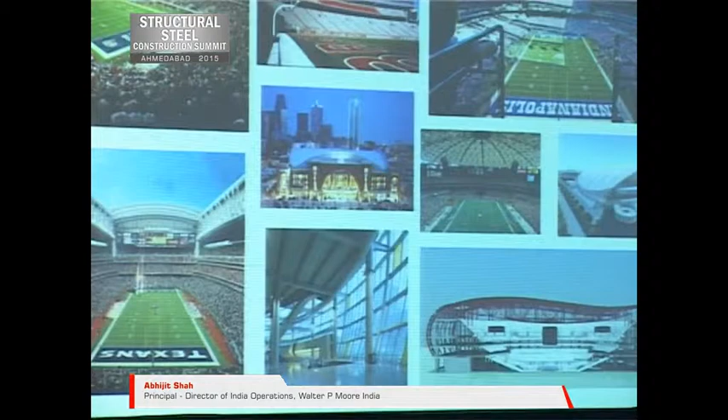In the steel part, we do everything that has long span structures. That includes airports - we're currently working on 3 international airports - a lot of convention centers, performance venues like performing arts centers and auditoriums, and most importantly, sports. That's my topic today.

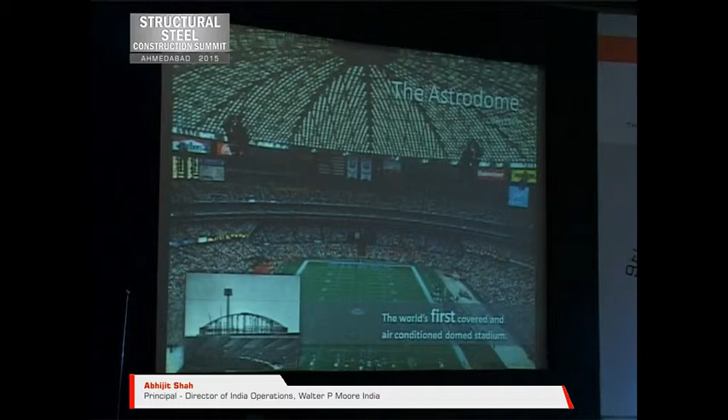We've done a lot of open air stadiums, like Target Field, which has won a lot of awards. We've done a lot of arenas, I would say at least 30 or 40. I know there's an arena coming up here in Ahmedabad, so I'm pretty excited about that.

The culture of having sports teams and sports stadiums has been slowly increasing in India, and that's very encouraging. We used to be a very cricket-centric country, and now all of a sudden sports like kabaddi, football and tennis are taking off, so that's very encouraging.

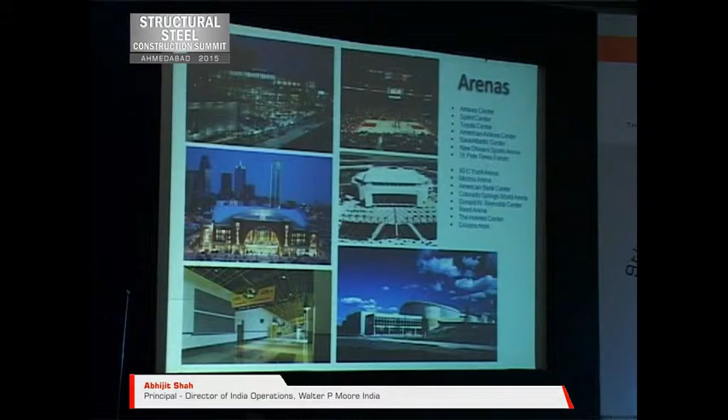I guess I've always been a wannabe sportsman, but I was not good at that, so I figured at least I'll help design some of the structures. This is one of our stadiums, Sprint Center arena.

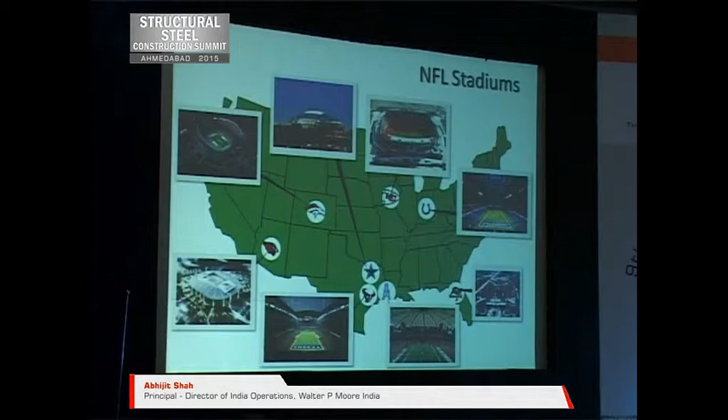We've done a lot of NFL - National Football League, and football here is American football, so pardon me for that - a lot of those stadiums as well. One of them, Invesco Field, about 65 or 70,000 people seating capacity for the Denver Broncos. But most recently, we have been the designers for the last 6 retractable roof stadiums in North America.

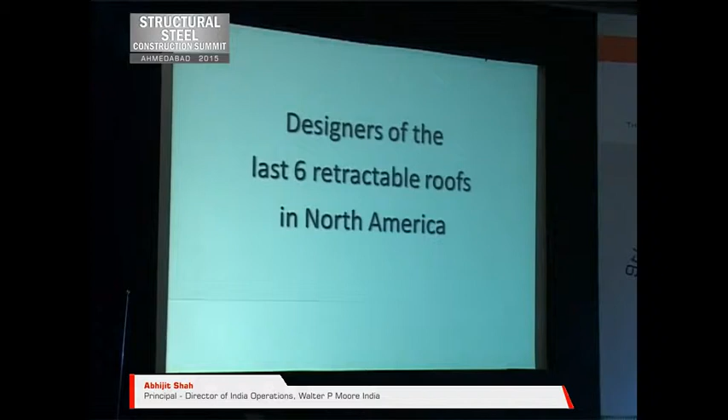Before I get to these, I wanted to try to answer a question: why? Why do we need a retractable roof on a stadium? There are multiple reasons why.

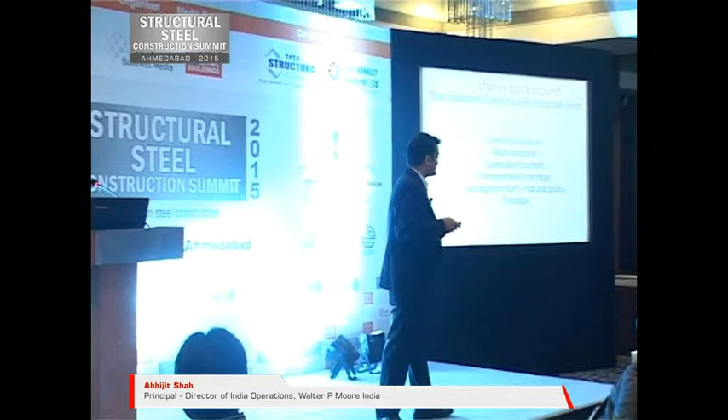But as in any other case, money is what governs anything. So there's a money background and a business case for having a retractable roof stadium - event assurance. If there's rain and the biggest event of the year, a tennis final or football game, has to be postponed, then what's the point? There's a lot of loss of revenue there.

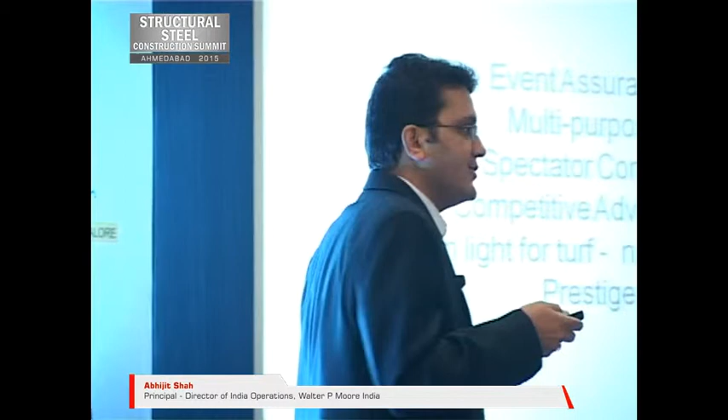You can turn your stadiums into multi-purpose venues. So if it's a football stadium, you can use it for other events like concerts, things that might need an open roof or a closed roof depending on the type of day. In Indian culture - I'm going to go to a wedding in Pune next month, and they're going to use a stadium to have a wedding. So just to generate more revenue, having a closed roof makes sense.

Spectator comfort, obviously - you don't want to go watch a cricket match... well, obviously, as Indians, we do spend the whole day there when it's very hot. Rajasthan Royals, for example - so having a roof and an enclosed stadium would be good.

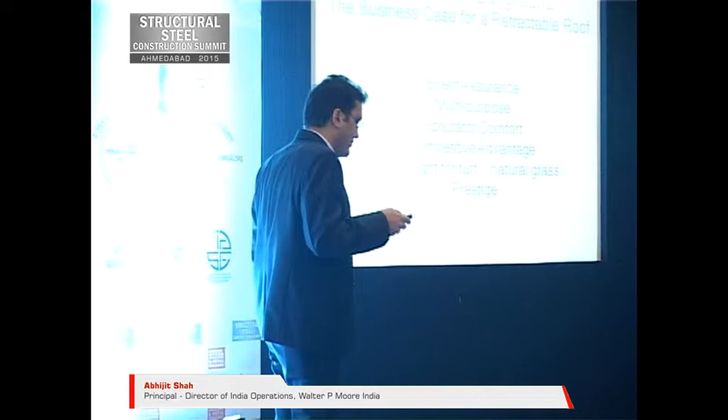A competitive advantage - you'll be able to sell more events than somebody else who doesn't have that. It's also important for a lot of football stadiums to have natural grass, and you cannot have natural grass if you have a closed roof stadium. So you have to have the ability to open the roof and let the grass grow a bit. And then there's prestige - that's one of the reasons we've seen around the world that just because some other team has a retractable roof stadium, this owner wants to have one as well. That's all right for us, I guess.

But if we are thinking that this is a new concept, to be able to be comfortable, to get sunlight or shade - think again. The Colosseum was the first retractable roof stadium.

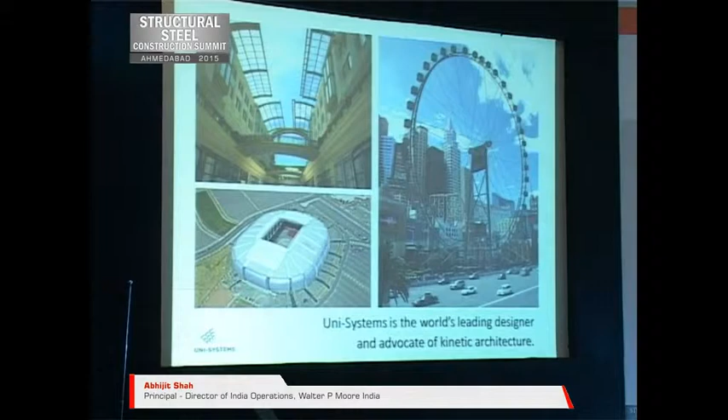Obviously it was a multi-purpose arena. Any architectural element that we can make move - it could be a wall, roof, anything you can think about - that's kinetic architecture, and they're one of the leaders in that. They do different types of projects, which I'll touch on a little bit later.

So coming back to the retractable roof stadiums - the first one we did was in 2000, done with the architect Populous, almost 41,000 seats in the ballpark. This is a baseball field, Minute Maid Stadium, in Houston. I'm not going to spend a lot of time on all 6 of them because I don't have that much time.

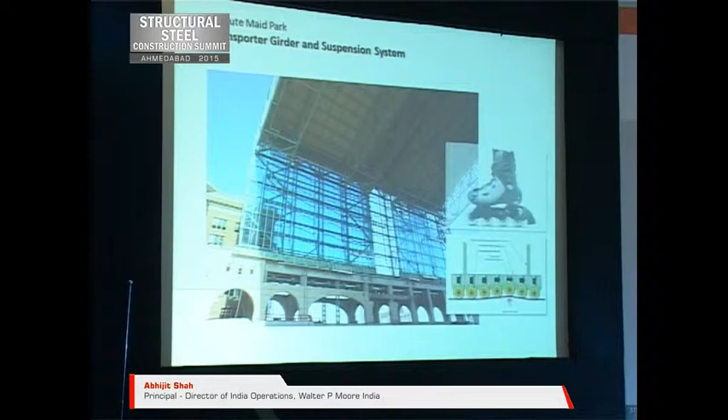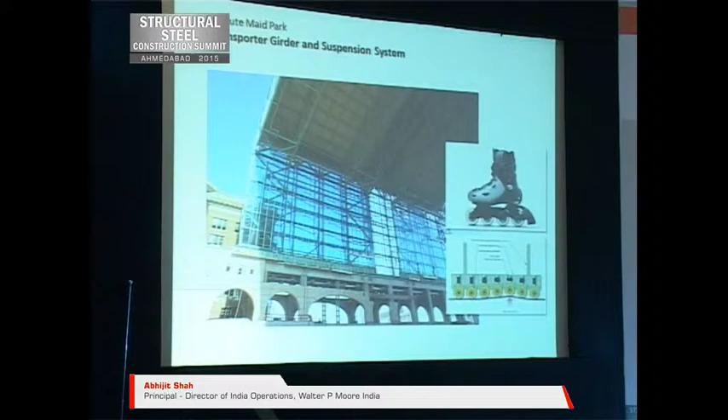I'll quickly go through this, but this whole entire roof moves and closes, so it becomes from open to a closed stadium. A retractable roof - you cannot think about it as just a fixed roof on wheels. There are many more complications that have to be designed: construction tolerances, temperature differences. We'll get into that a little bit.

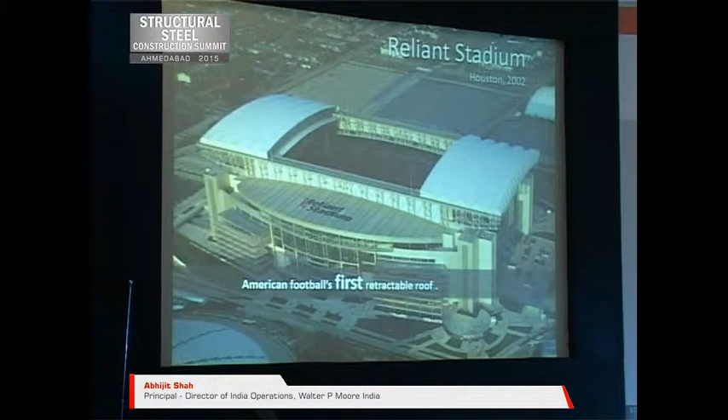The second one is the Reliant Stadium, again in Houston, and this is the first football retractable roof, American football. Here you can see these 2 big trusses, supported on these super columns. There are only 4 columns and 2 big trusses that support the entire roof. Then there are these elements - the retractable roof that closes it up.

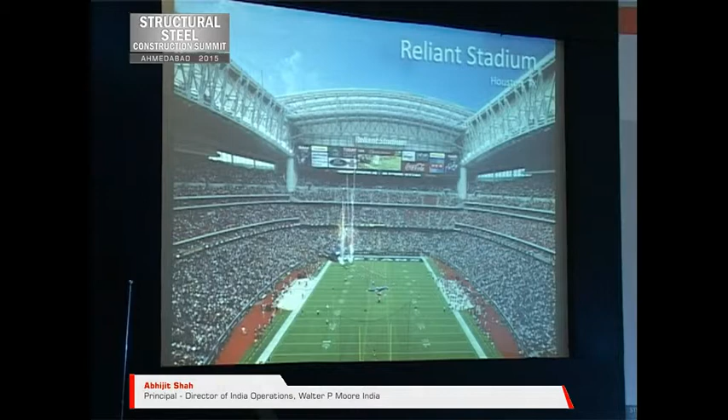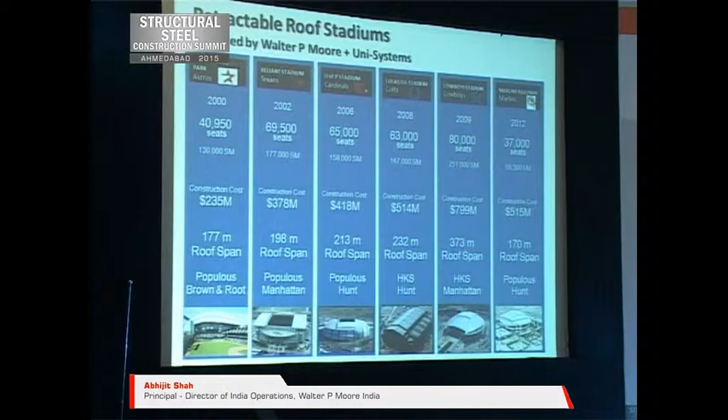The next one is the University of Phoenix Stadium, where the Arizona Cardinals play in Phoenix. This one - I guess in one of the presentations earlier we talked about keeping the structure simple, having a minimalistic approach - this truss is a very unique design here, and hopefully I'll have some more shots of that.

Here you'll see a little bit of a difference - this roof is a fabric roof because it allows some light to pass through it as well.

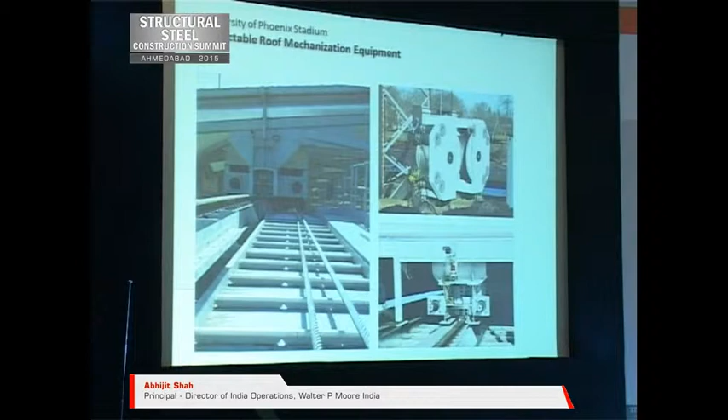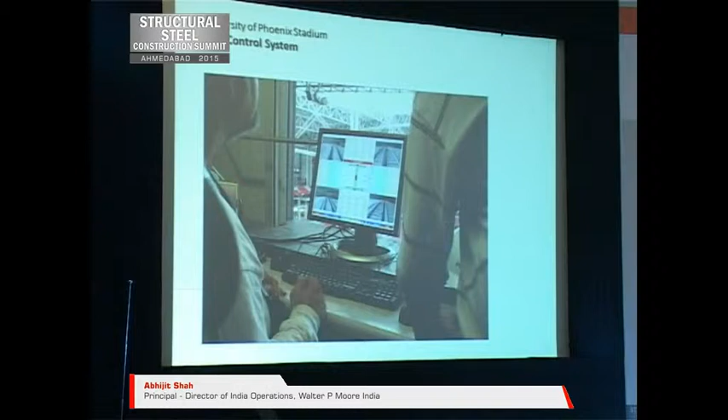This is the drum and cable mechanism used to move that roof. It has a very automated system, so basically we are moving this roof at the touch of a button. It takes about 12 to 15 minutes typically to close or open these roofs.

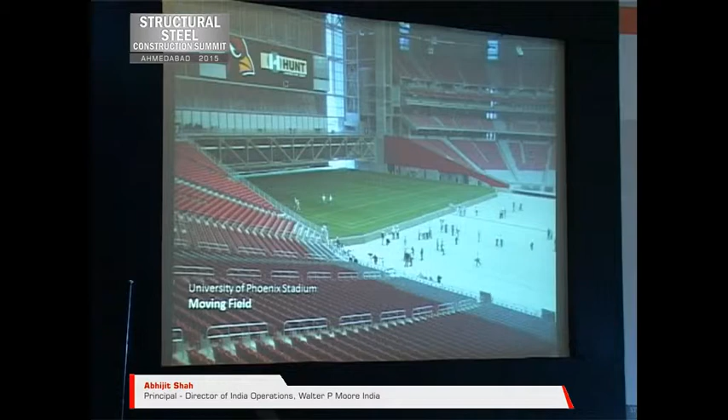A unique feature about this stadium is it doesn't only have a retractable roof, it has a retractable field as well. The whole field where they play football on is a structured thing, and the whole thing can move out of the stadium so that they can grow natural grass to play football on. So we have to do a lot of testing - these huge 300-pound guys, when they're all jumping and running around, shouldn't feel any vibrations. So we have to do a lot of prototype testing.

The next one is the Lucas Oil Stadium in Indianapolis. This is like a very Midwest country design, so it has a barn kind of feel to it.

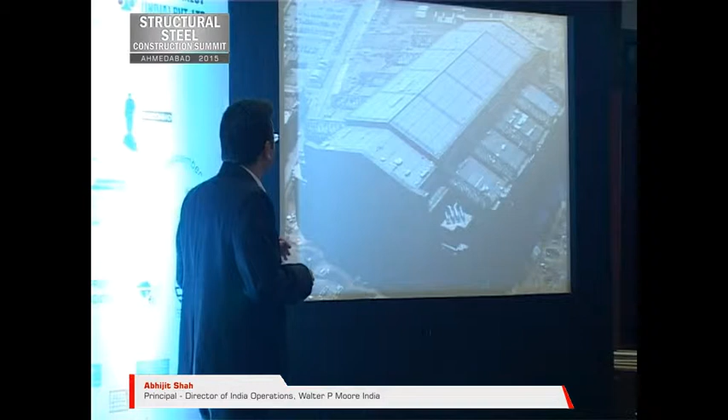These are the panels that open up on both sloping sides, and it also has an operable wall which opens up. Again, this has a little bit different drive system because it has to go uphill.

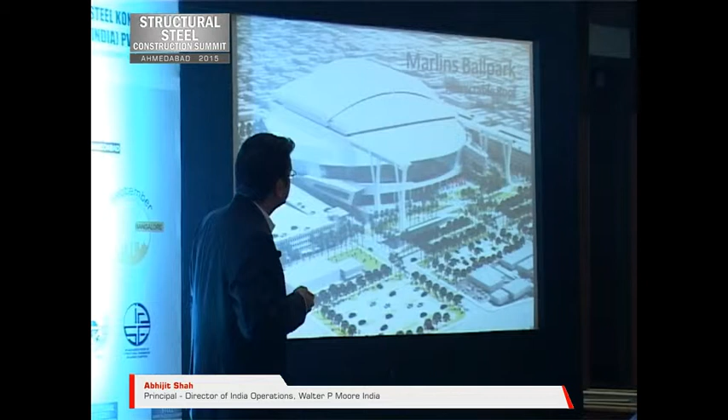I'm going to skip the Cowboys Stadium for now and go to the Marlins, the last one, the Marlins Ballpark. This is in Miami, Florida. The unique thing about this one is the roof all goes on one side.

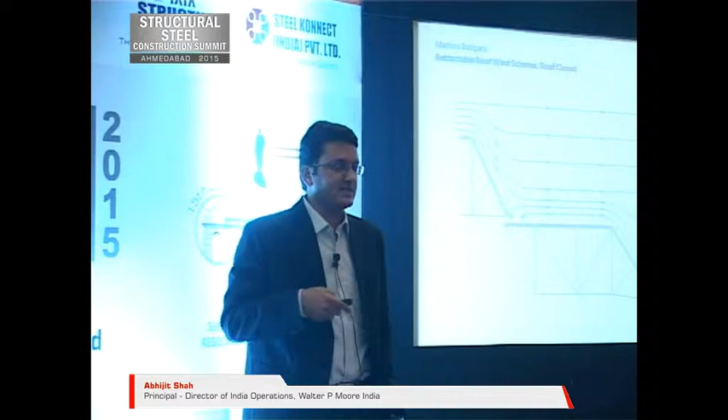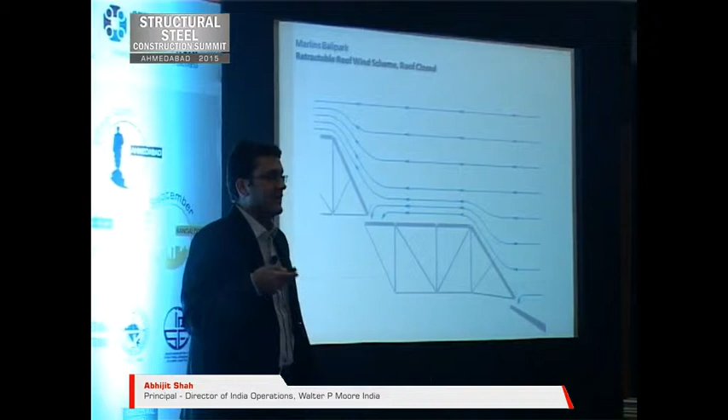One thing we do on all these projects is a lot of wind tunnel testing, because we need to understand the wind pattern, especially being in Miami where there's a chance of hurricanes. One of the charges given to us was that it has to not allow any air to come into the stadium during a hurricane so there's no damage.

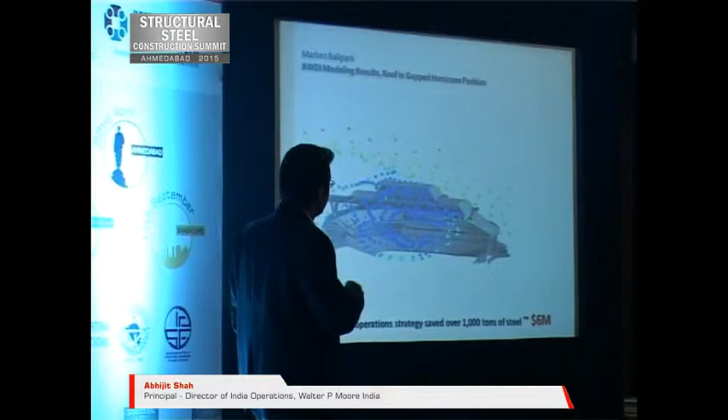We did a lot of wind tunnel testing and fluid dynamic testing, and we realized that if we actually keep a little bit of gap in there and let the air come in, we were able to save about 1,000 tons of steel. That's about $6 million worth of steel saved by doing that.

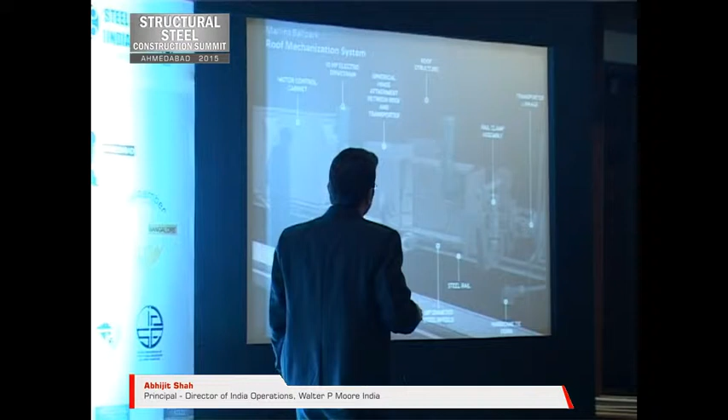This is just a shot of the mechanization. You can see the transporter, which is a stiff member here, and then the hurricane ties that hold it down and tie it back to the structure. Here's a shot of that, and here's a shot of the construction.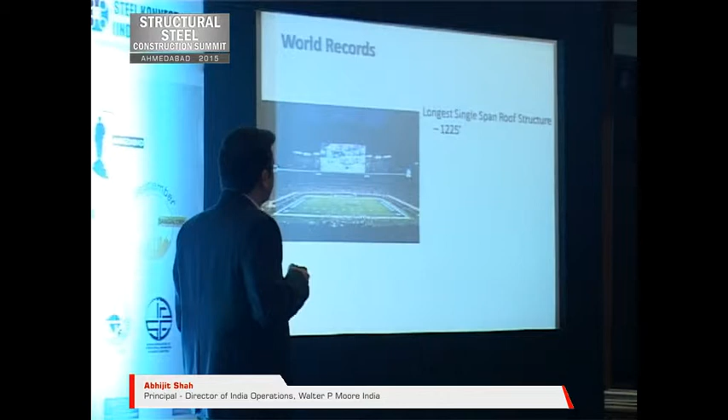This stadium sets a lot of records, five world records basically. First, it has the longest single span roof structure, with 1,225 foot long arches. That record still stands, and I think I'm very fortunate to be able to work on this stadium.

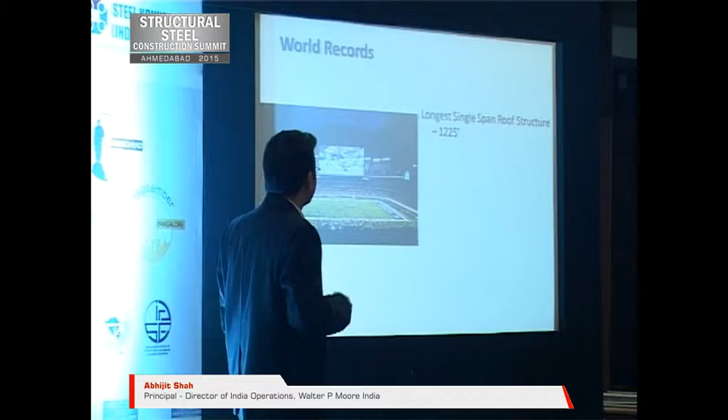This is one of the largest dome sports facilities with 660,000 square feet. Again, the largest video board display - this thing here is 150 feet long, it's huge. It also has the largest operable glass walls.

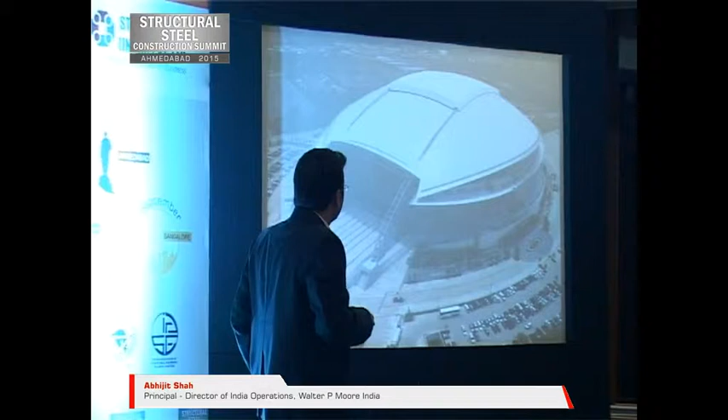So this is the overall view of the stadium with these arches that go from this side to the other side. There are no interior supports on the entire stadium.

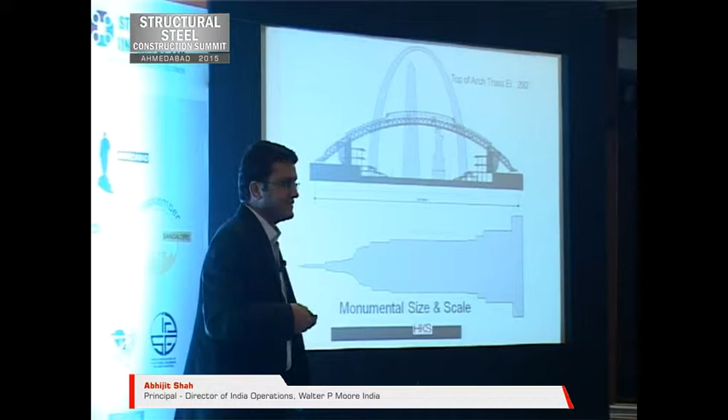Well, this picture pretty much speaks for itself, but here's the Statue of Liberty - you can stand up right inside it - and the Empire State Building. That's how long the arches are.

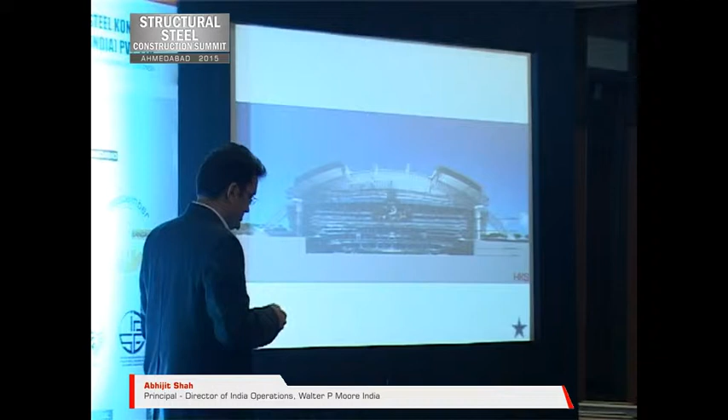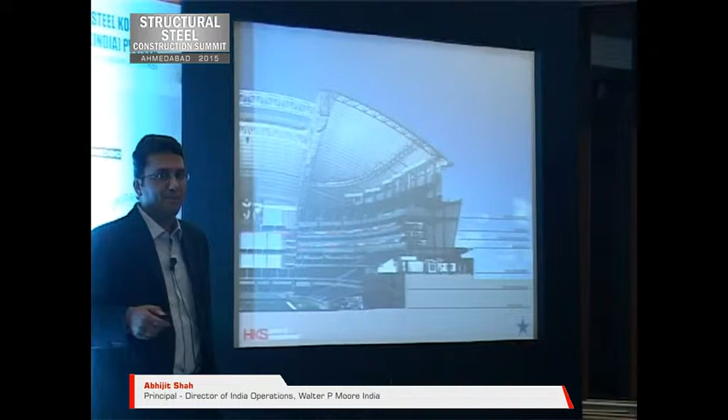This is a section showing that. This is 50 feet below the ground, where the playing surface is in this case. Another section shows there's a lot of box or suite levels in this sector, and a lot of seating as well - there's actually 11 elevated levels of concrete seating.

Just a quick thing about the schedule: the design took 17 months, the construction took 40 months, and it took 8 million man hours to do the construction, and I only get 20 man minutes to present it, so we're going a little fast.

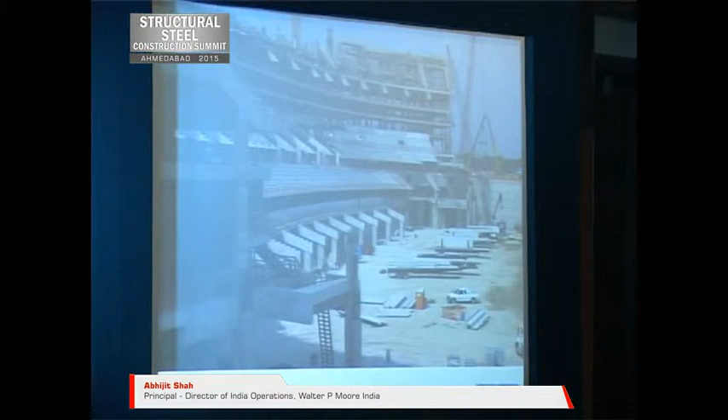I know we are talking about the steel part here, but just to give you an idea, this is how the concrete construction went - there are 11 levels of it. This can seat 80,000 people at one time, and for a special event like a Super Bowl, it could seat 100,000 people.

The reason I'm showing this picture is there's a ring beam, a concrete ring beam, which supports the roof on one side. This gives you a general idea about the scheme for the roof, where basically we have 2 arches, then 6 box trusses that span in between the arches. These are the 2 retractable panels that open out, and the secondary members that span from the roof to the concrete beams.

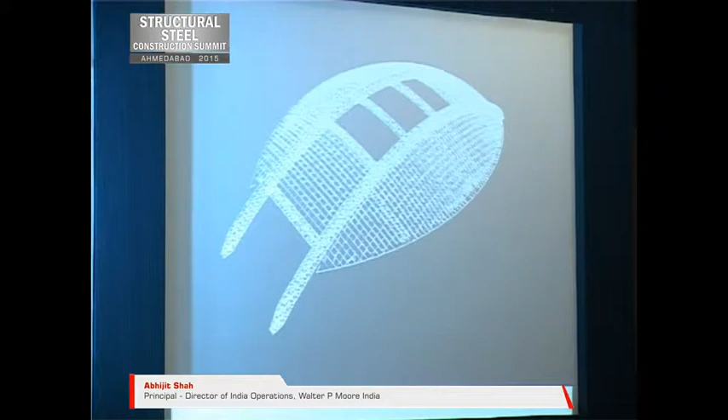Just to show the different members, here's the steel deck. The load from the deck goes to the secondary trusses, then to the box trusses, which in turn transfer it to the 2 arches. The secondary structure, these planar trusses, span from the arch to the concrete ring beam here, which is this member.

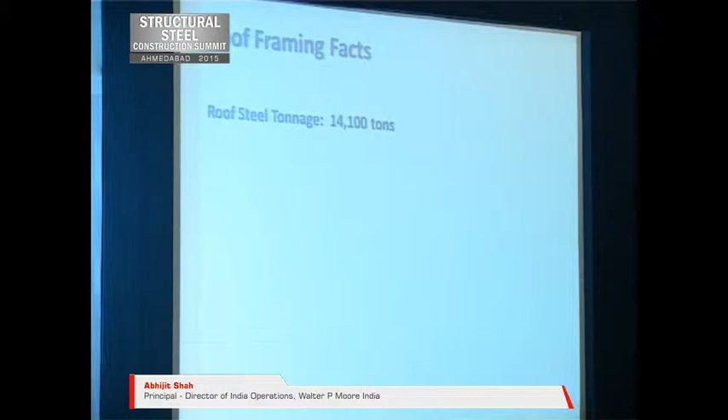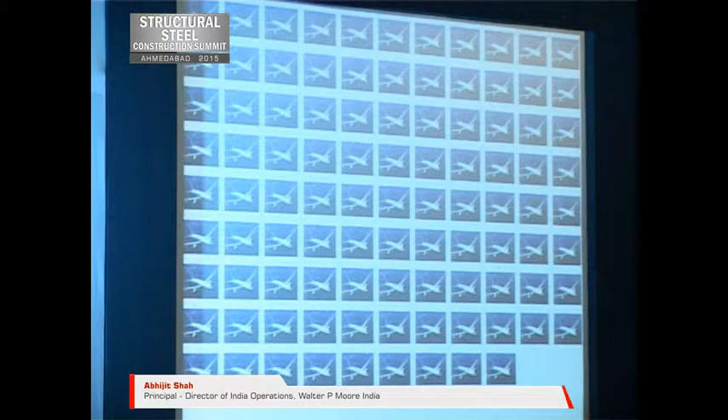This is the model of the bowl, just to give you an idea, and that's the complete model of the structure. So this project had 14,100 tons of steel, and that's about - if you take a Boeing 777 and use 97 of those - you get 1 Cowboys Stadium.

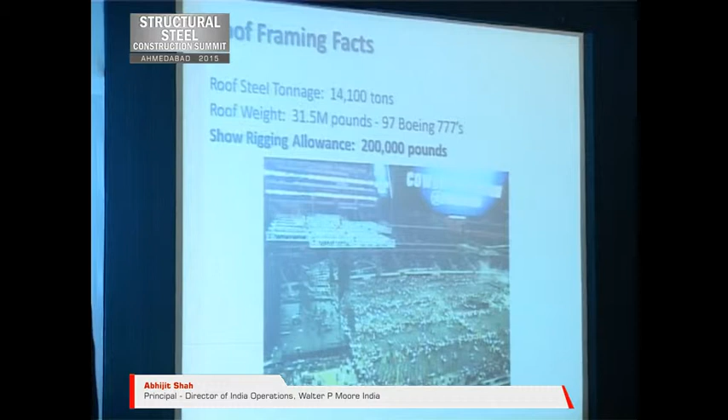The show rigging allowance, that's another thing from an event standpoint. We can support up to 200,000 pounds of show rigging. This is a concert, so the stadium is now transformed into a concert. I guess people are still coming in.

The arch trusses used a grade 65 steel that was imported from Luxembourg. They don't make that in the US still. The rest of the steel was grade 50 and grade 36.

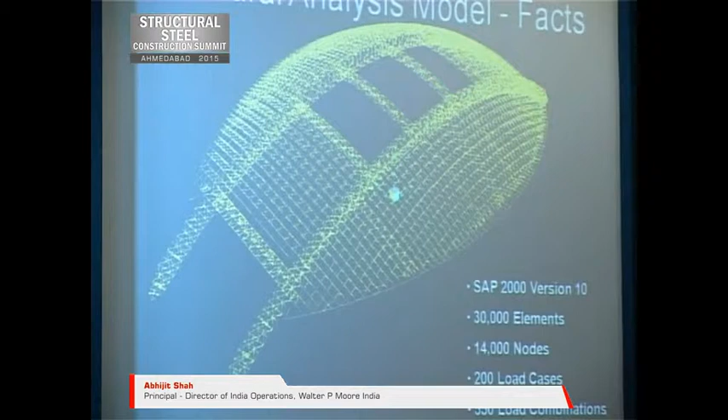That brings us to the analysis model. So now you take all those wind conditions, and that gives you 200 total load cases and 550 load combinations to run in that model. We used SAP to design this. There's 14,000 nodes and 30,000 elements in this model.

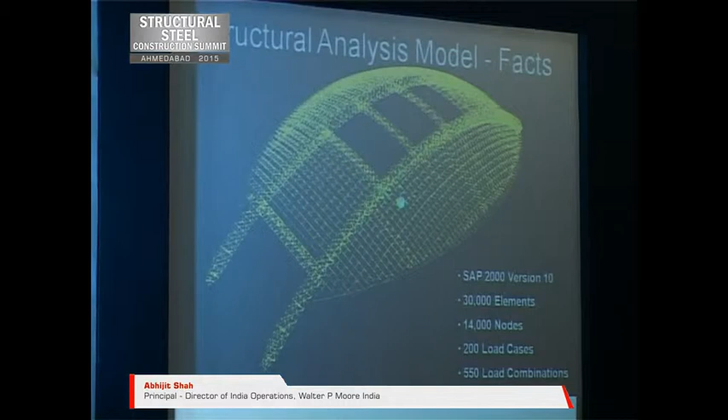This was only 3 or 4 years ago, but the computing power we had, even compared to what we have right now, meant to design the model we had to run it overnight on 4 or 5 different machines. The next morning you'd find out you made a mistake, so you'd do it again the next day. The next night you'd wake up at 3 o'clock in the middle of the night, hit run again, and go back to sleep. We had to do quite a bit of that.

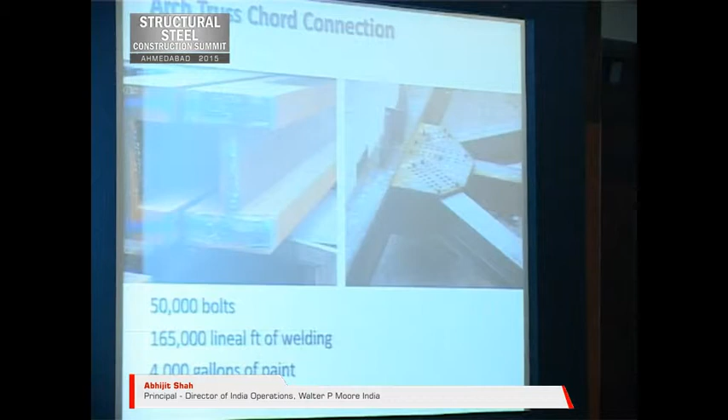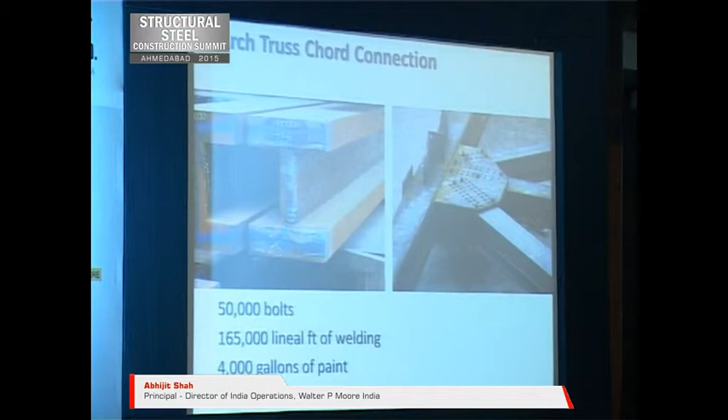The steel arches themselves, like I said, each one weighs 325 tons. I just threw in this picture to give you an idea. The 4 chords of the arch trusses - the arch truss was 35 feet deep, 17 feet wide, each one of those. And each one at the 4 corners had a member like this, 14 by 730 - that 730 means it's 730 pounds per foot, the weight of each member. There's 4 of those, trussed out in between. That's pretty heavy - I'm 150 pounds, so you can imagine how heavy those things are.

On all our projects like this, I think the structural engineer's role is not only in designing and then going away - I know there's a lot of fabricators and steel providers here. So we do a lot of design work or erection analysis for our contractors as well. We design, and you have to do that while you're designing it. If you don't know how it's going to be built, then just designing it in the final condition doesn't really do you much good.

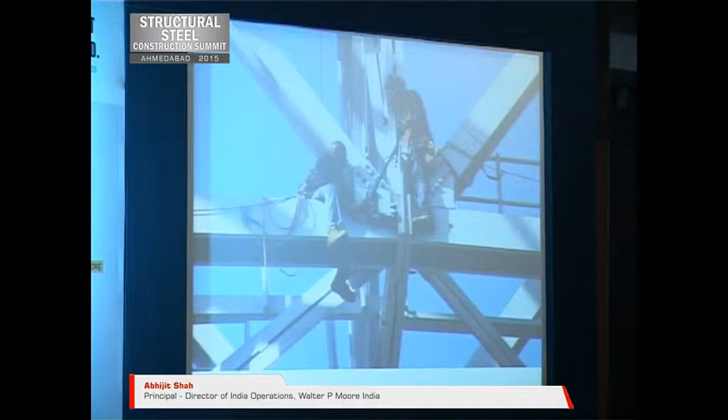We design each of those trusses. It was like in 57-foot segments or something, and then it was connected by end plates.

This picture is showing the arches being built from both sides, and thankfully they met correctly at the center. That's how the shoring towers were used. This day, none of the engineering team will forget - this is the day they took off the shoring towers.

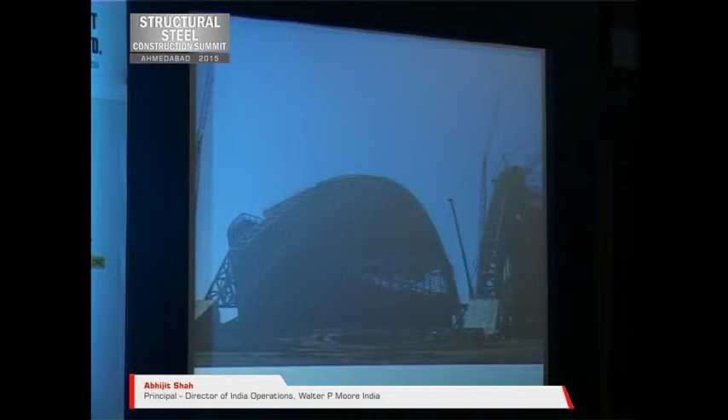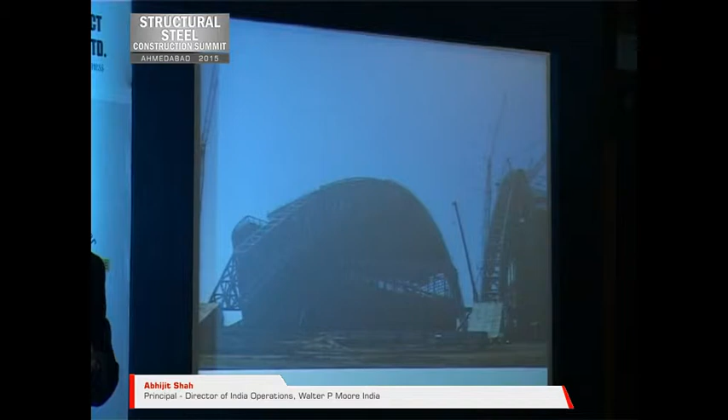Even though you know you've designed something correctly, that day you're a little bit nervous - confident but still a little nervous. The deflection we had designed it for, analytically we found it was going to deflect 15 inches, and that's exactly what it deflected to - it was 14 point something, but pretty close, I would say. So like I said, the integration of the erector early on makes a hell of a difference.

I'm going to talk a little bit about the arch supports. With all this thrust coming down, the arch support pin condition was very critical. This was basically the pin bearing - if you see there's 1, 2, 3, 4 elements going on. That was a casted element, cast in Michigan, milled in Massachusetts, and then brought to Texas. It's 64,000 pounds each, so it had to be perfect for it to be a pin element.

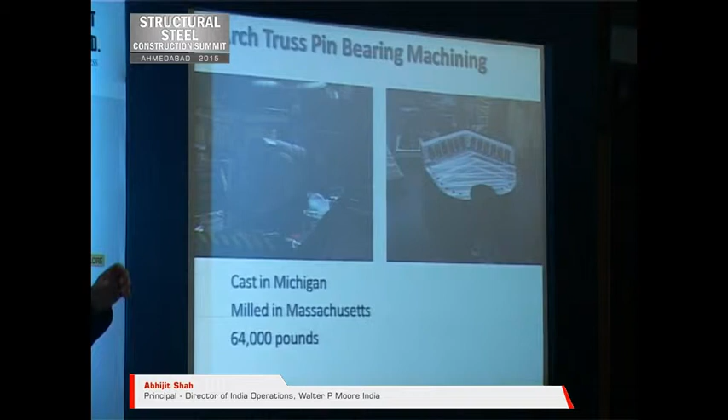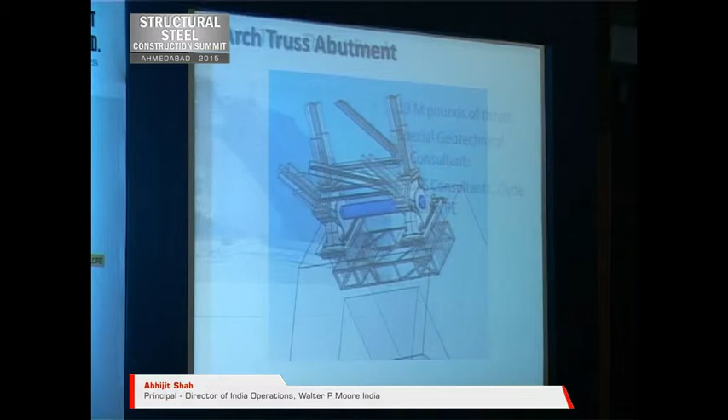Then we had to put it on the field itself, and it was supported on this thing which we were calling the abutment, with a lot of anchor bolts connecting it to the abutment. This is an interesting picture - this is what's above the ground, and this is where that steel pin we saw is going to go. This is the abutment - looks like it's steel, but it's concrete.

It's just 1% reinforcement, but to get an idea of how big it is, you'll see there's an iron worker over here, just one guy. This is huge because it has to support 19 million pounds of thrust. What you see above the ground is this part here, but below the ground we're resisting all that in friction. This thing is 170 feet long and 71 feet deep, with two walls at 18 feet on center. So it was a huge reaction.

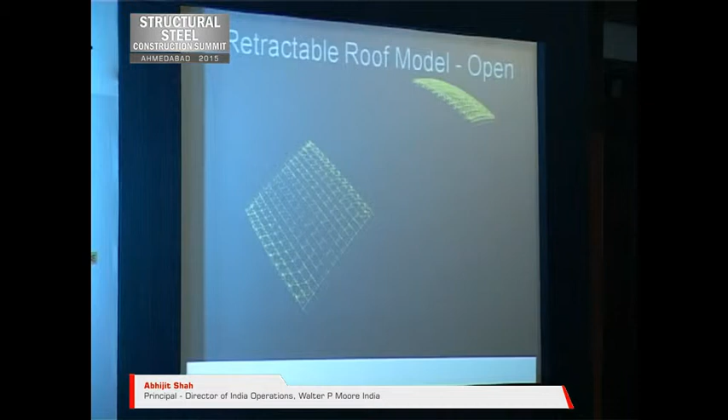Talking a little bit about the retractable roof models. These are the retractable pieces that come and park over here. This is shot from the inside, shot from the outside, and it's lifted up. But this is how we designed it.

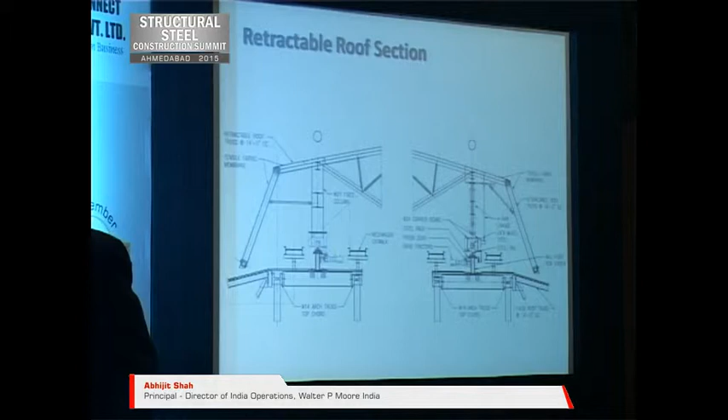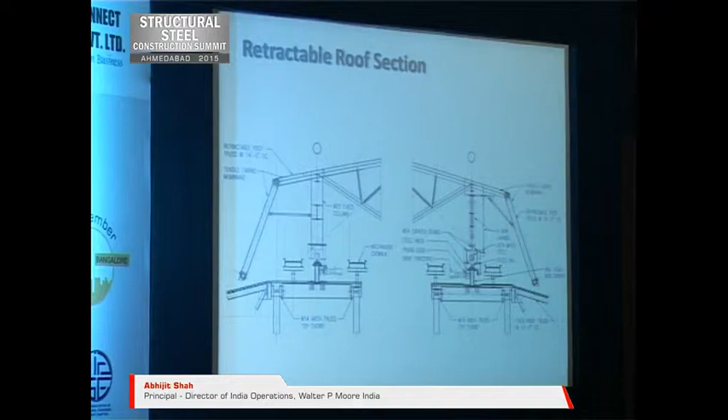This is like a section cutting through the retractable roof section. On one side it's fixed, on the other side it has the 4-bar linkage. So when there's any lateral movement due to change in temperature conditions, or some misalignment in the rail, it shouldn't damage the rails or the operation. That's why we let this move, and I have another way to explain that.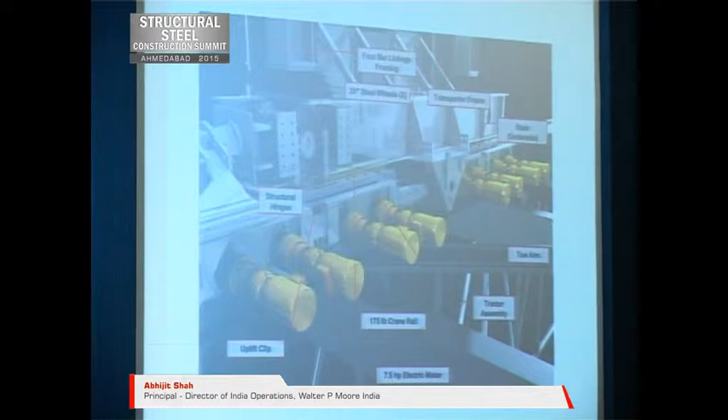This part, the main transporter frame, is rigid. This is the 4-bar linkage over here, and these are the electric motors, only 7.5 horsepower motors, 64 of those for each one. So it doesn't take a lot of horsepower to move these things.

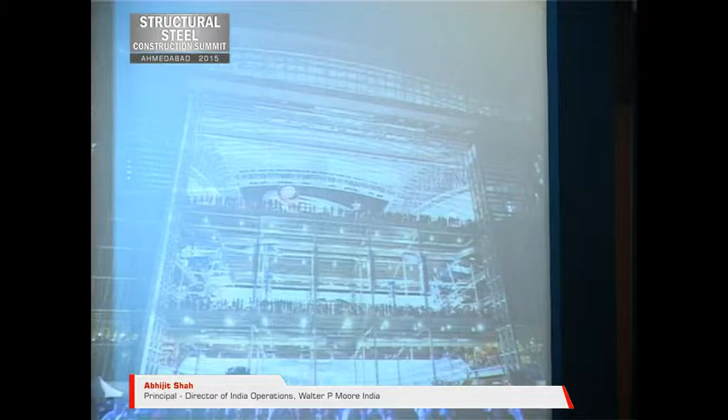This is another shot of that and the actual picture. I'll show you a few more construction photos of that, just because I like it. Let's go through that real quick. This is a nice view, the two glass walls that are opened up, and you can see the entire stadium. People can stand outside, inside, and mingle. It's a huge structure. This is an interior shot again.

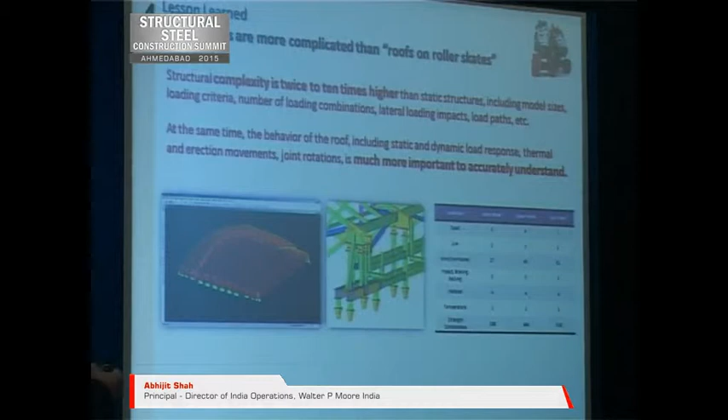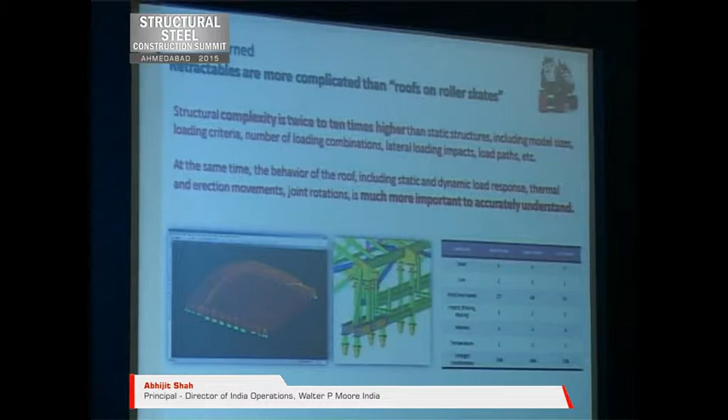On these 6 projects that I just talked about, there are a lot of lessons we've learned, and we captured those because a lot of things have gone wrong in previous projects, not designed by us, but I'll show you some examples. One thing we have to understand is retractables are more complicated than just roofs on roller skates. That's not what it is, because the design has to account for complexity that's twice to 10 times higher than a static structure.

There's strong evidence, a track record of things going wrong. These are other retractable roof stadiums, some in Europe, some in Japan, this one is in the US, which haven't worked well. So if you're spending so much money and they don't work well, and they don't open when they're supposed to, the owner is not going to be very happy.

For example, a lot of you know about the Wembley roof. It also has a retractable roof, but it used to take 10 minutes to open it, now it takes 56 minutes. That's why having the integration of a good mechanical consultant who understands the small details about moving something, working with a structural engineer who can work with that, is very, very important.

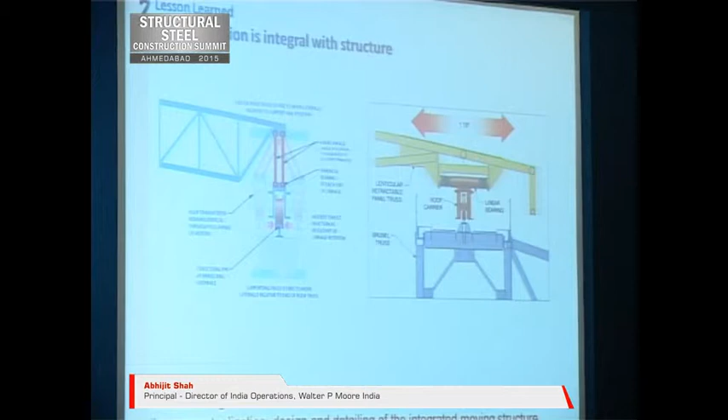A simple example: if there's a high point in the roof, well, these are not Swiss watches we're making, these are big stadiums, so there are going to be construction tolerance issues. Then it has to have some flexibility to move. Different roofs will need different solutions, because not all buildings are made equal.

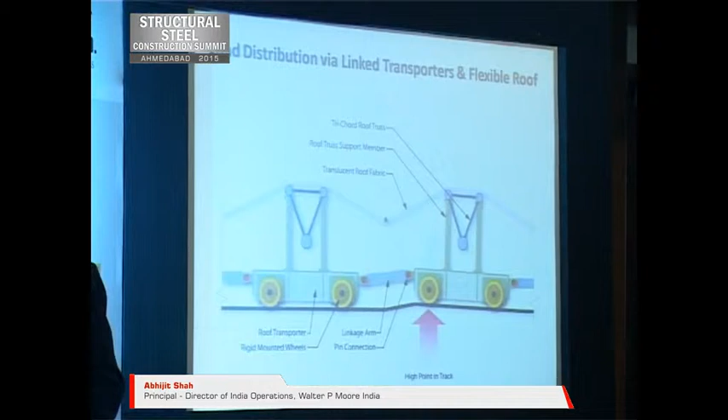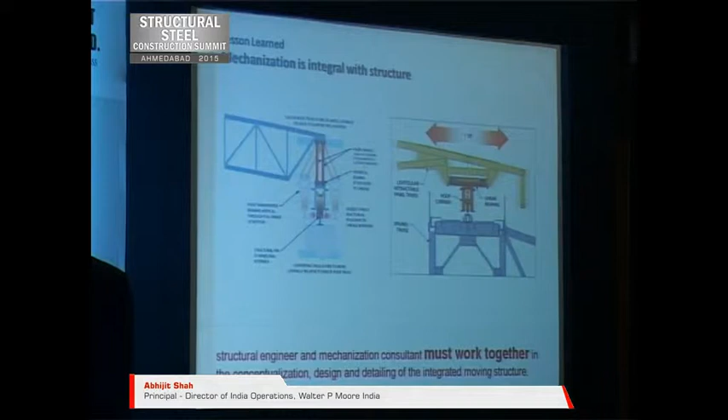This shows how the 4-bar linkage that I showed in the Cowboys Stadium works - if there's movement in this direction, it doesn't put a big load on this rail and can still manage to move the roof properly. Another technique we've used is a linear bearing on the side.

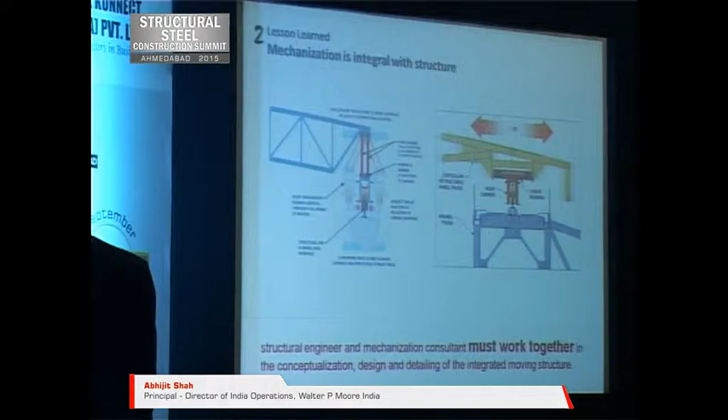On the Minute Maid Park, you can see there's a hydraulic damper here. This is a released hinge, and the fixed one is over here. So there are different mechanisms we've used to make this work correctly. Again, a similar thing for this one - this is the linear bearing I was telling you about. This was on the University of Phoenix Stadium.

Third lesson, and most important - this is not only for retractable roof stadiums. I guess economy comes from simplicity and a holistic approach. That's true for any project, but more so here. You have to use load paths and things that are very simple, not try to make things unnecessarily complicated.

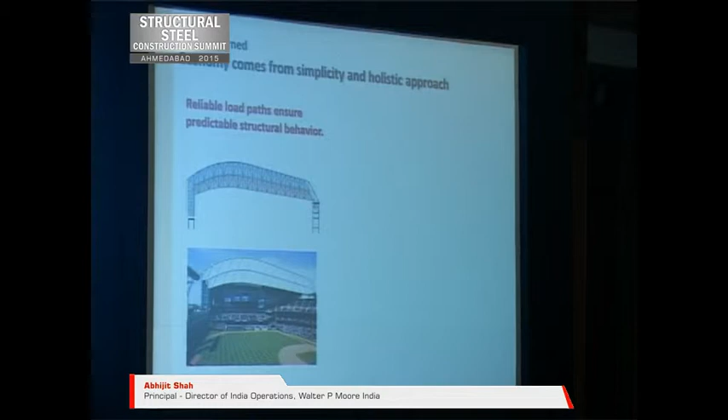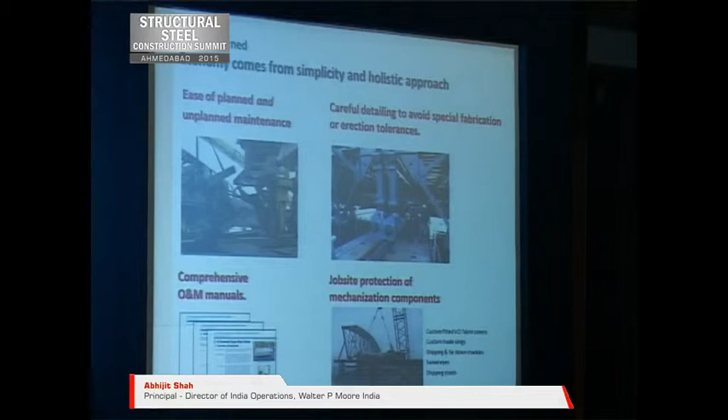Use of proven and reliable parts, that's very important. And if you're not using something that's been proven, you have to figure out how you're going to do the maintenance part of it. You have to look at these as long-term buildings, like we were discussing with somebody earlier. These are not projects that will go away in 10 years, 20 years, or something like that.

Erection planning is important, like I told you guys earlier. And the design has to be fail-safe. You always have to think about what if, because especially in this field, there have been some failures. And by failures, I don't mean something has collapsed, but if a retractable roof doesn't retract, I think that's a failure.

So if there are parts that you haven't done before, we do a lot of prototyping and testing for the life cycle of the project. That I think is very important, to make sure that it will act in the way that you think it is going to act.

It's a continuity of responsibility. You cannot just design it and walk away. In doing the parts - actually getting the right parts, milling it, making sure it's done correctly - that is the responsibility of every structural engineer. And we have to be in a design assist role. We cannot just walk away from the problem.

And the recipe for success is a well-structured process. We cannot do this without understanding the challenge - it's going to be different for each project. The right team has to be there, agree on the goals, make sure that the owner and the client know what they're getting into, and use a structured process to manage the risk and take a holistic approach.

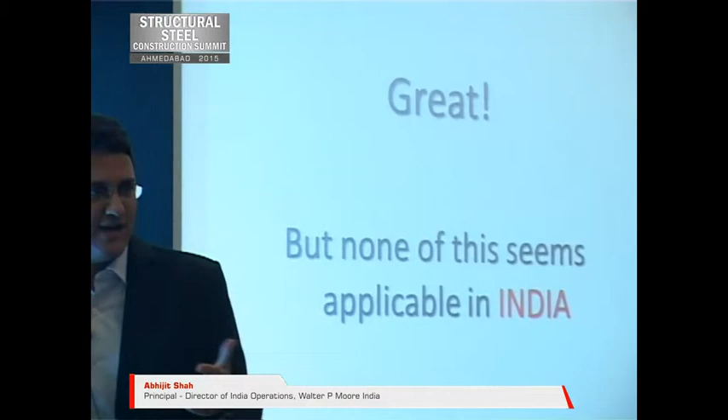So you guys must be thinking, great, that's all good, thank you for showing us that. But probably none of that is applicable in India, is probably what I'm sure you guys are thinking. And I've thought about that as well. But that's actually not right.

Retractable roofs - we have to think about this as kinetic architecture. There are many applications for this; we're not talking about just the roof. Even for cricket stadiums, we can actually do that, like we've done in a lot of football stadiums. There are a lot of different fabrics available, and like anything else, the technology is evolving. Fabric that can cover the whole roof can basically be shrunk down into a very small area, suspended from the center of the roof or from one side as a cantilever, and then the whole roof can be covered. So there are many things we can do there.

You can use it as a shade, which rotates depending on the time of day and encloses your building, so you can protect it from the sunlight and you don't have to spend as much, especially on net zero buildings. This is a very good application, something similar that has already been done.

Talking to one of the architects here in India, he was saying, can you actually do a retractable flat? I said maybe not the whole flat, but if you want to have a living room that just pops out - if you're going to have a party at your luxurious building, and you want to make something special - you can have the whole living room kind of cantilever out, and then you can have a party right there.